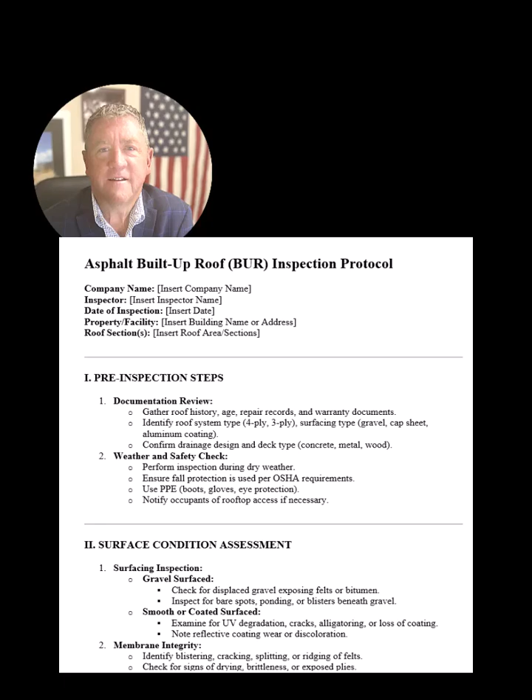I think I'll start by saying the importance of regular roof inspections is underestimated by the general public. I think for us that are roofing contractors or inspectors, we see the value and we see all the problems and issues on a daily basis. When we walk these roofs, we'll see flashing that's loose or missing, debris on the roofs, gutters and scuppers that are clogged, holes from the HVAC guys. We'll see all of these issues and problems. And people that are on the ground very rarely, if ever, will get on the roof and really see the condition of their roofs. So it's very, very important that roofs are maintained, and that starts with an inspection.

We were talking about this issue just a few minutes ago about the importance of a roofing inspection, and I just told a few of my guys: if I was a building owner of a large commercial building, let's say it was in Michigan somewhere, I would want someone, my property manager or someone, to provide me with an annual or biannual inspection of the condition of my roof, because the roof is the number one defense to the building enclosure. If the roof fails, it's very, very expensive to repair or replace. And when the roof fails, if you have a commercial building, you're usually leasing it.

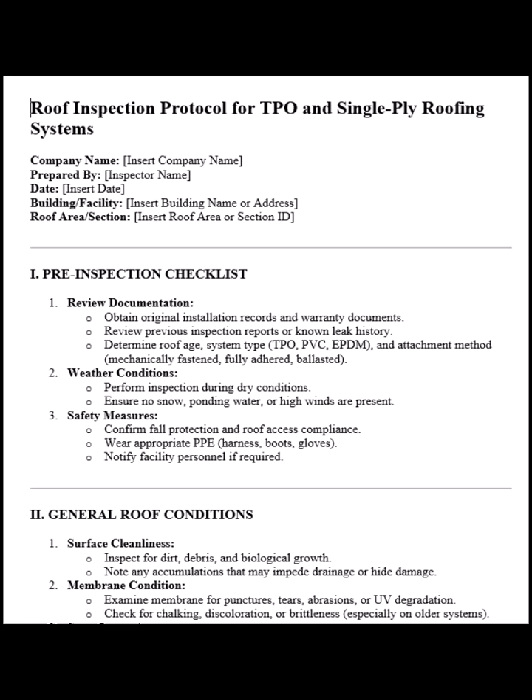I'll start with single ply inspection, okay? How's that? So this is a little template, and we're going to send this out to you so everybody has it. This is just a format, okay - you guys can doll it up and do it how you want. There's also a lot of apps and other report writing things.

We use Roof Logic, if anybody's familiar with that. It's a paid subscription, a database where you can put a lot of different roofs. You can give your clients a password, use a tablet, and when you're up there taking photos it'll live download it, so you can create a report before you even get off the roof. We love it, it's really easy to use, our clients love it too. It's really built for roofers - it has a management program that can give a rating to the roof, and that rating can be addressed through a budget, so you can actually create budgets for school districts or cities or different things like that.

So it's really helpful. But of course, if you're going to do an inspection, don't do like most guys where you go inspect the roof, take a couple pictures, walk in with your cell phone, and try to get a contract or some type of job from the client just based on going up on a roof. If you're going to go up there, you need to create a report, and your report needs to be well spelled out.

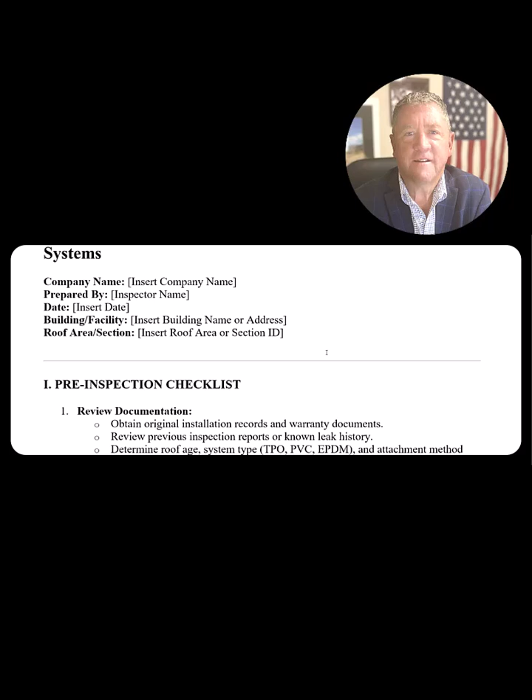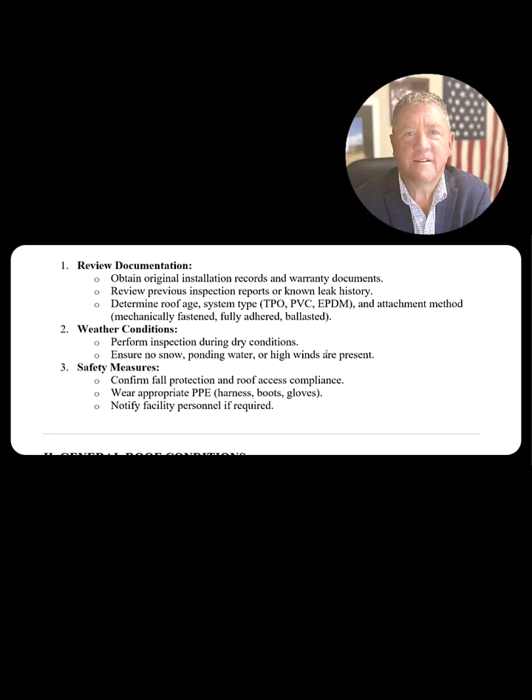Here's a lot of things that we do in our inspection. The pre-inspection checklist is to review documentation - obtain the original installation records and warranty documents. If your clients will give you this stuff, usually you have a real good chance of having an ongoing relationship with them.

And any as-built plans you can get, anything you can get from the clients is pay dirt for you to be their guy for, you know, the future. Because most inspections that we do, it's not a big money maker, right? People aren't going to pay us a fortune to do inspections, but the reason we do the inspections is when there's a storm or there's a problem or a re-roof, then we get to work. And so that's what the whole program's usually about for most people. Everybody's a little different, but for us and for others, that's the way it is.

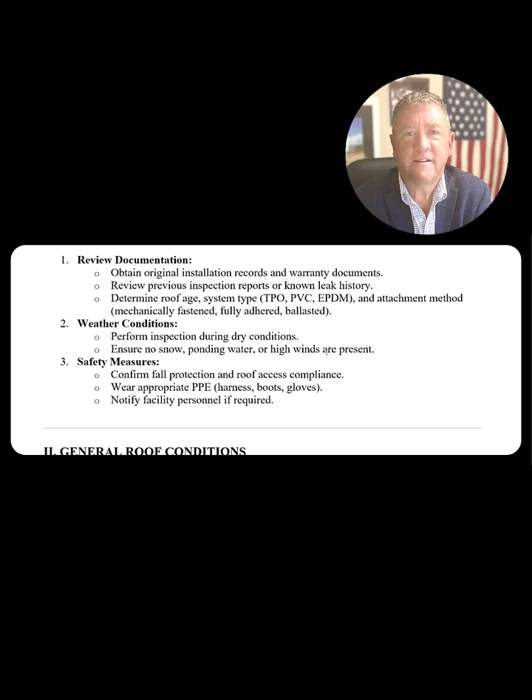But if you get the original warranties, then you can show them, hey, you had a 55-mile-an-hour wind here, or you had hail damage here, and this warranty is going to be void, even though you have a warranty. And you may want to call the warranty manufacturer out or the warranty company and have them do an inspection. Also, be aware that if there is a warranty on the building, they are the ones that have to come do any repairs. So notify that warranty company, but also educate your client that for the warranty to stay in place, they have to be the ones that come back and do the patches. So be careful with that little situation.

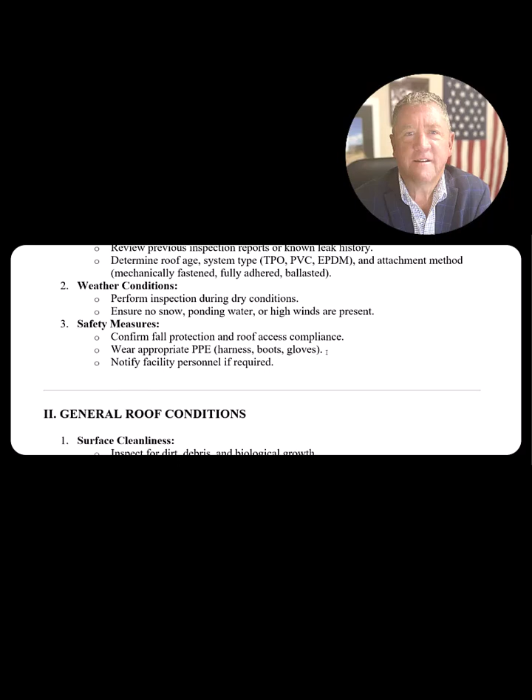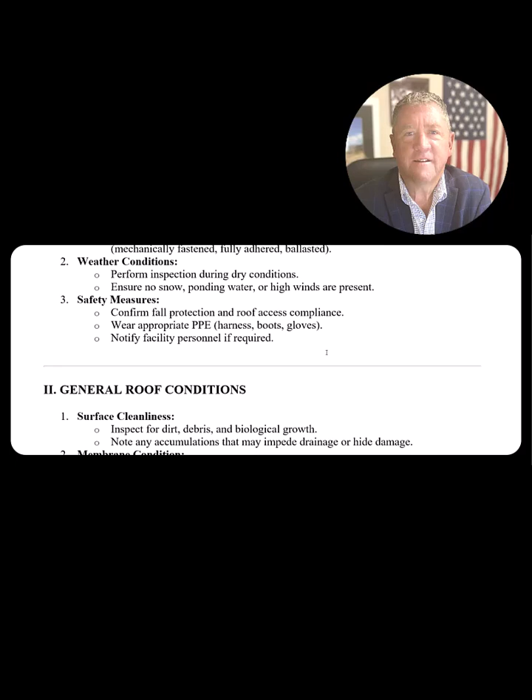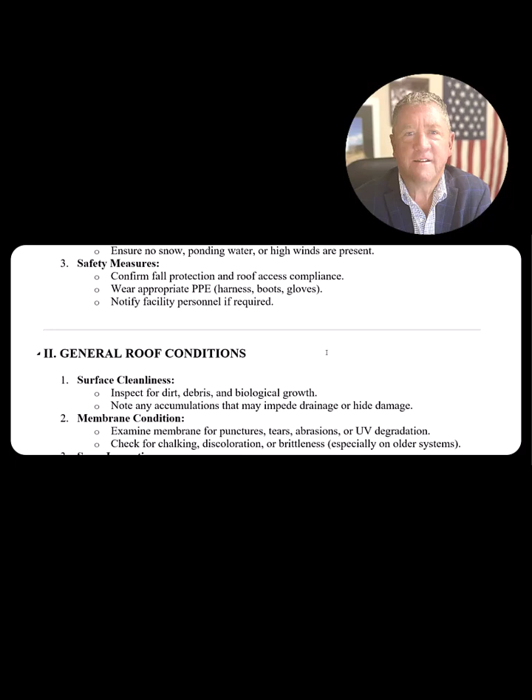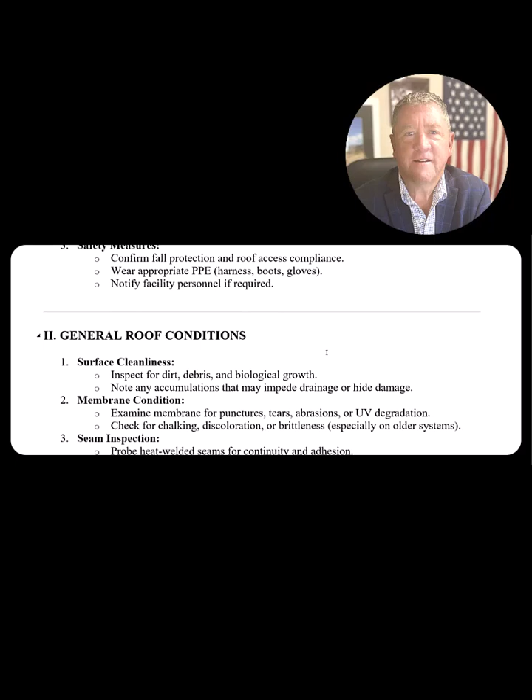Review previous inspection reports. Also, any known leak history, very important. Then determine the roof age, system type, and the attaching method. Of course, don't do inspections when it's raining or sleeting or snowing or anything like that. And also try to do it when there's no ponding water or high winds present. And then, of course, everybody knows all about the PPE and different fall protection and stuff like that.

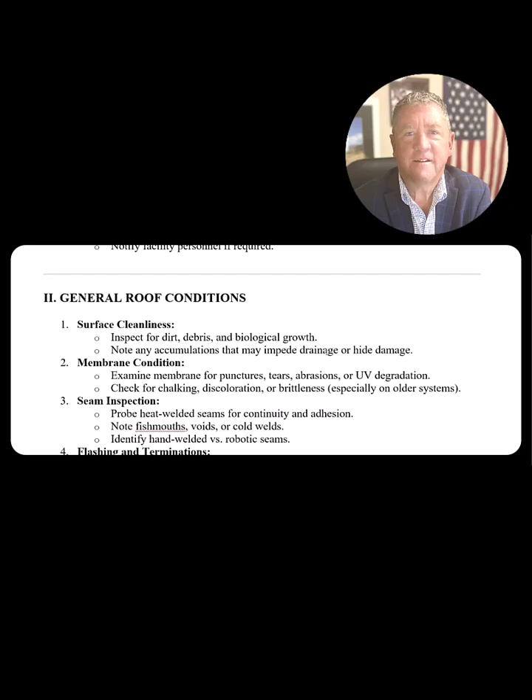Notify your client when you're coming, and also notify the facility people. A lot of times we'll have the owner of the building tell us, hey, go inspect, and we get out there and somebody's throwing a fit because we're up on their roof. So make sure that you loop everybody in, or you'll cause yourself a lot of problems. We've been down that road more than once. So make sure everybody is in line.

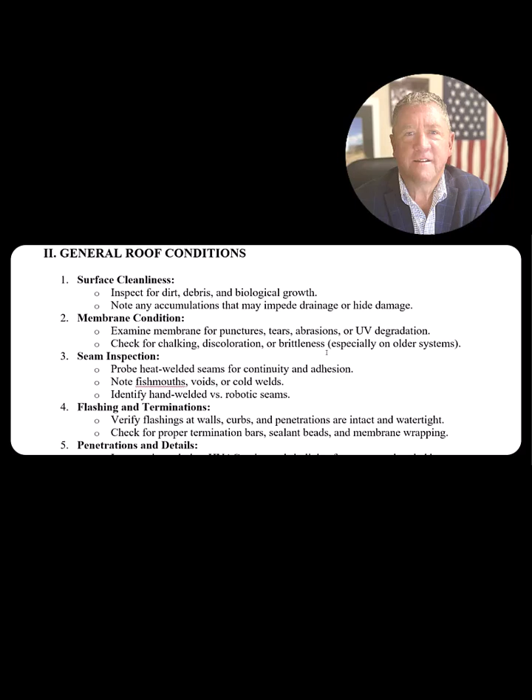If it's a city or especially a school district, make sure everybody follows the protocol. Checking in at the front desk at every location. And I know everybody wants to just blow and go and get the job done. Make sure they check in at the office, they get a badge, everybody knows they're on campus. Make sure the people that go out there are not felons, okay, first of all, or have any kind of history of criminal behavior. You cannot send people out on public institutions that have problems. So make sure that you do your due diligence in all of that area.

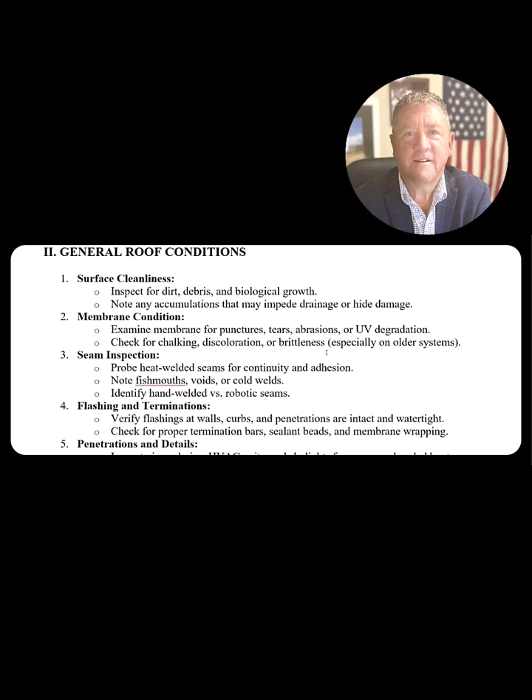But these are some general roof conditions that you want to inspect for. Dirt, debris, and biological growth, okay? And here's the thing: recommend to your client what to do. Don't just tell them, hey, there's dirt from that dust storm in Amarillo, Texas, there's 2 inches of dirt up on your roof. No, say, here's some dirt, here's some debris, this needs to be taken care of. Here's a price from our company to come and power wash it or to do whatever you're going to do. Or at least put some type of a price together where they know, hey, if I clean the dirt and debris off of this organic growth, then this is what it's going to cost me. Have systems in place, have things you can do to help the people.

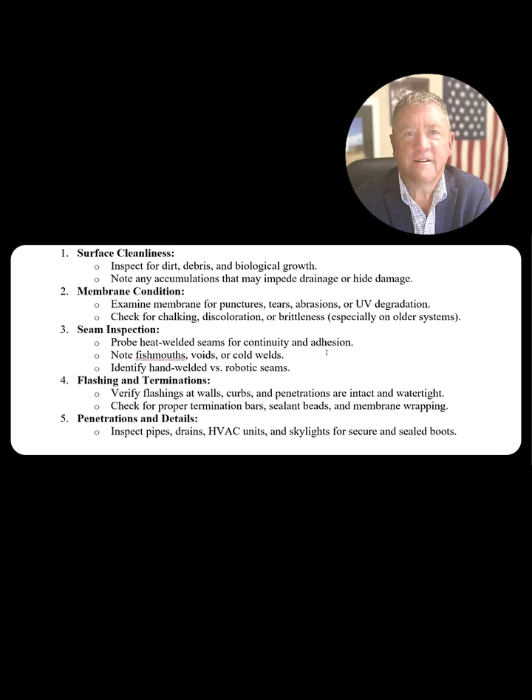If it's a modified bitumen cap sheet and it has tons and tons of granule loss and there's not enough hail damage on it for a claim, you may want to recommend a coating. And so have that information, have that price for a coating, and coatings are very profitable. But a coating is designed to give more life to the roof. That's what it's designed to do. So have those things kind of in your little bag of tricks that you're trying to sell to particular people.

Look at drainage. Look at anything that may be a problem on the roof. And you may walk into a building, and I've done this, it was a fairly new elementary school, I believe in Corpus Christi, Texas, and we went inside and looked and saw leaks, and I mean the school was probably 2 years old or less. And we get up on the roof, and immediately I find this was a design problem. They got a huge design problem here. So the first thing I tell my client is, hey, we got a big design problem.

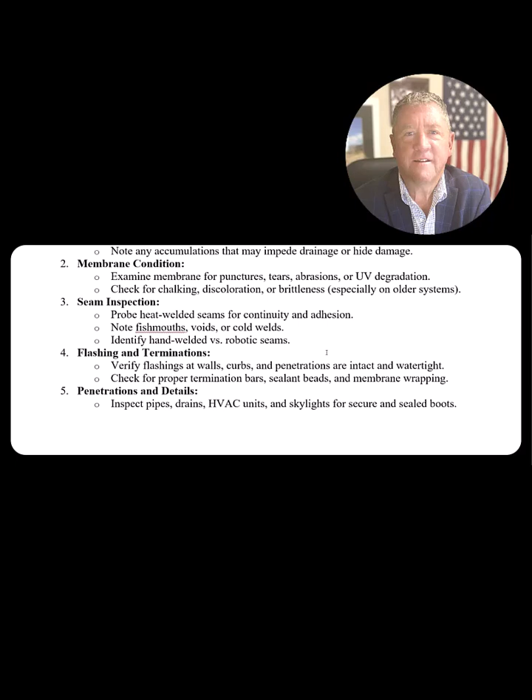You need to get with your architect and you need to get this fixed because this will not go away. If you have a bad design, there's no roofing that's going to help. I mean, it'll help for a year or so, but it's going to be a continual problem. So if you're the guy or gal that points that out and comes up with a solution, now you're the one they will begin to give their business to.

Membrane condition: examine membranes for punctures, tears, abrasions, and UV degradation. Check for chalking, discoloration, brittleness, especially in older systems. It's real important. The older the system is, the more issues and problems you're probably going to find. There's more things that you can do to give that roof some more life. And so do your research, know the products that are out there, know the proper repairs of each system.

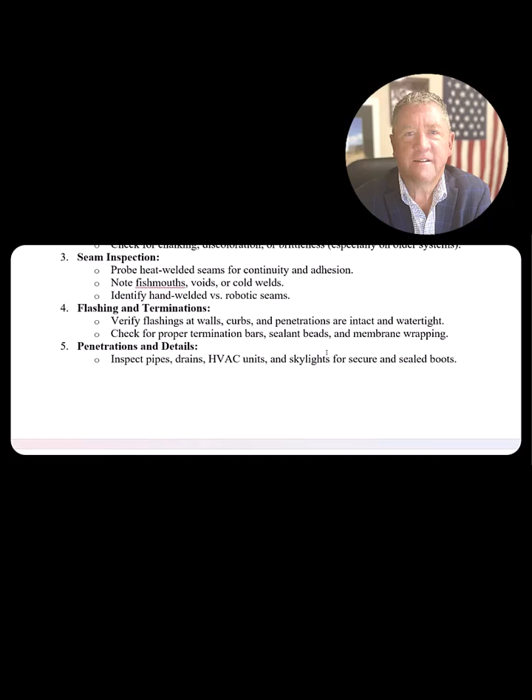In the past, we've seen a lot of coal tar roofs, and the coal tar roofs are failing. And as we look closer, we find the main reason they're failing is because people used regular asphalt on a coal tar roof. They're using the wrong product for this particular application. So know what type of roof you're on and know what the applications are and the repair methods for those particular things. NRCA has most of that stuff mapped out for all of us, and it's pretty easy to find.

Of course, seam inspection. We like to take a probe with us, and we check all the welds. Make sure they're not failing. Look for fish mouths, cold welds, and of course, here it says identify hand welds versus robotic seams. Yeah, you got to look at all those. It takes a lot of time to really do a good inspection.

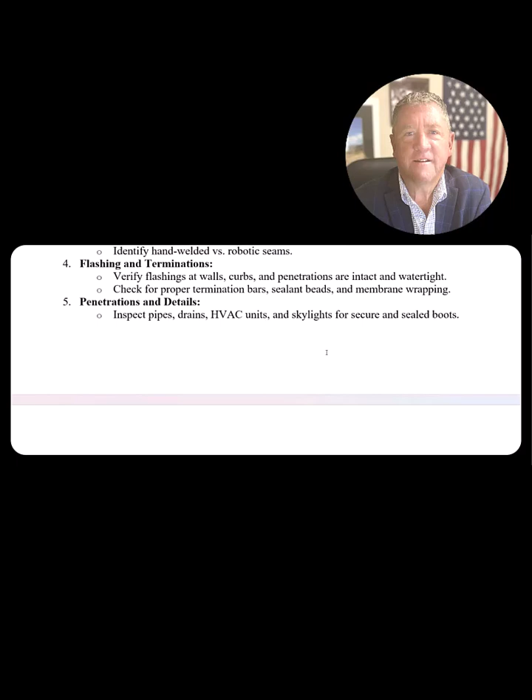You got to walk those seams, and you got to make sure that there's not an issue or a problem that's coming, because the last thing you want to do is create a report and then they have a leak 2 weeks later in a system that you just missed. So make sure that you're seeing those areas. And of course, usually the big wide open areas, those are usually robotic seams. The areas that are really, really tight, those are usually hand welded, and usually you can tell by the material as well.

Flashing and terminations, really, really big. What we find is that people don't like putting in any more screws than they absolutely have to. And so the flashings and the terminations usually don't have enough screws in them. So that should be a recommendation that you make. Do your homework. Know how many screws there should be on this particular application. Should it be 6 inches? Should it be 12 inches? Know those things so that when you get up there, you can show the issue, and then have a solution to the problem for them.

Check for proper termination bar sealants. And sealant bead is big. Sealants need to be replaced on a periodical basis. Most people don't know that or realize that. If you have sealants, caulking and different things, a lot of that needs torn out every 5 years? What would you say, Joe? Joe says about every 5 years, all that needs torn out and redone for the roof to be watertight, because the UV is really tough on roofing systems.

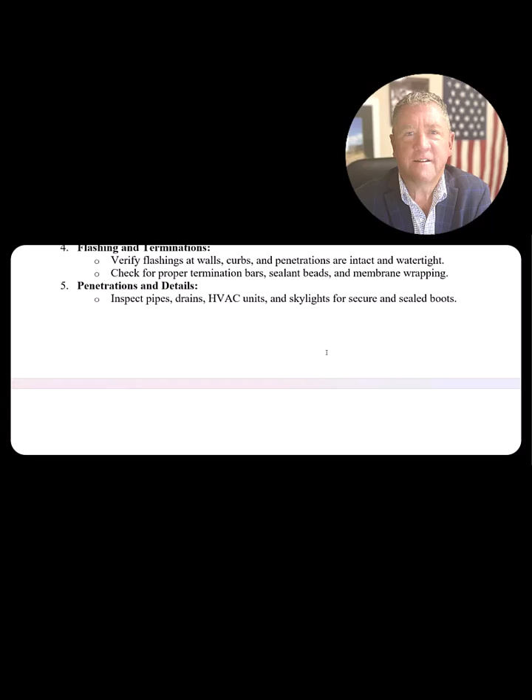The heat that's produced on top of a roof is absolutely mind-boggling. We've all walked those roofs in the middle of the summer. So just make sure you're looking for these termination bars, the different seams, and that you're doing a proper inspection on it.

Penetrations and details: inspect the pipes, drains, HVAC units, skylights, the whole deal. We like to measure the drains, 4 inch, 6 inch. Then when we do our calculations, we can quickly see if they have enough drains. We want to check to see if there's any emergency drains. If there's no emergency drains, that might be a recommendation. Hey, you don't have any emergency drains on this system, so I would recommend that we put in a scupper, or we add some emergency drains.

But do the calculations. It's real easy. If you need any of that, email us. We'll send it to you. It's real simple to do. Anybody that knows how to do simple math can do all that stuff. You can also call Core Forensics, and they'll come out and do a complete write-up for you as well.

Ensure pitch pockets are properly filled and sealed. Identify any signs of movement or mechanical damage around penetrations.

Here's what happens a lot of times: the tenant will hire people to get up on the roof and put in a vent or add a bathroom or do something, and they do horrible work on top of the roof. And the owner of the building doesn't even know. Most times they don't know that their roof was compromised. So when you find those things, also know who the tenant is below, because that could be an issue for the owner of the building. And of course, if you help them fix that issue, then you're the guy or the gal.

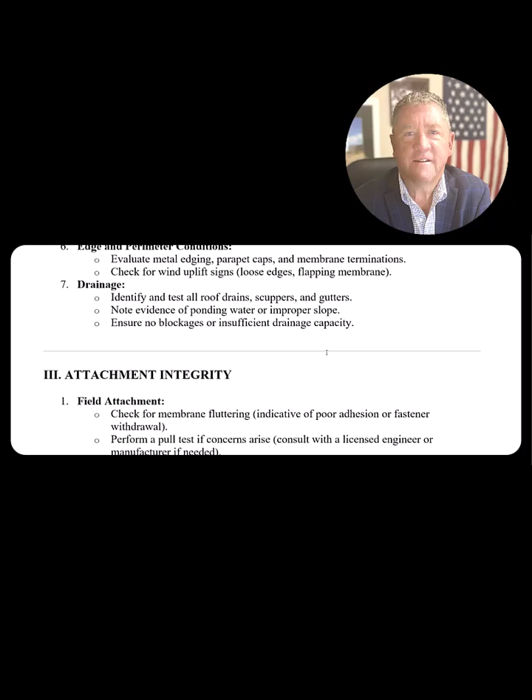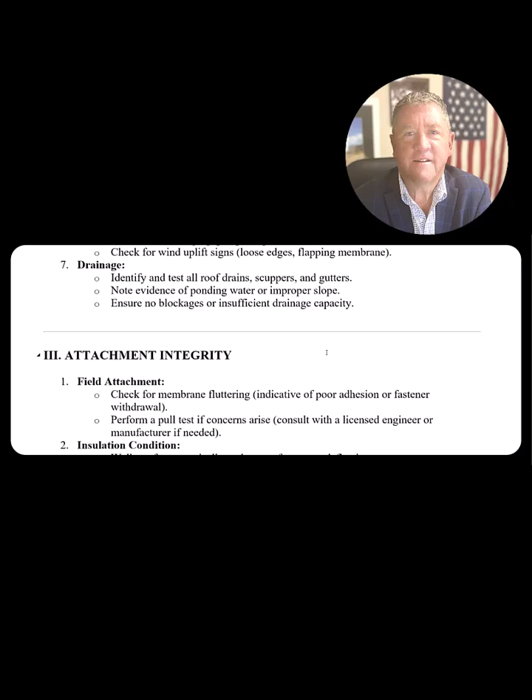So, real important. Edge and perimeter conditions: evaluate metal edging, parapet caps, membrane terminations, check for wind uplift signs, loose edges, flapping membrane.

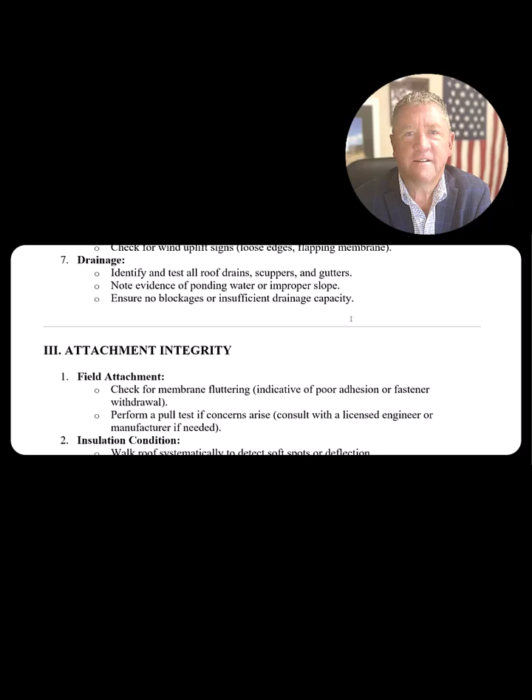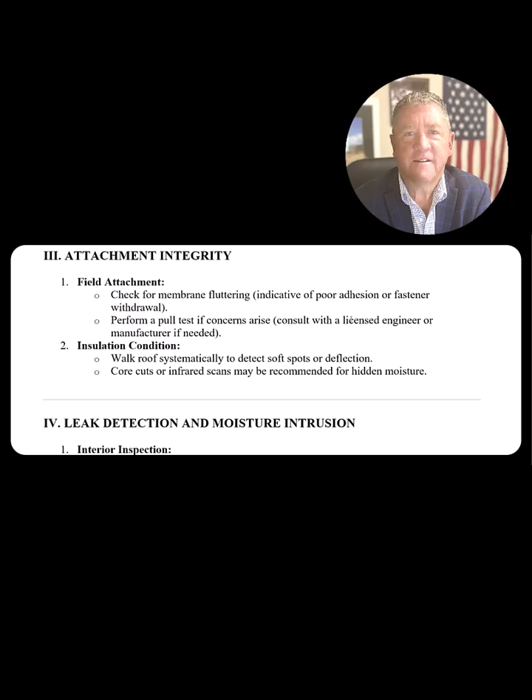So just be careful that you're seeing everything. Spend some time on the roof. Make sure you don't miss anything, because all this is very, very important. Next we're going to talk about attachment integrity. The attachment integrity on that photo I showed you was inadequate. Whenever it lifts like that, there's no adhesion anymore. If a fastener is pulled up, it's not fastened anymore. That is a recipe for disaster, because a high wind comes, takes that roof, peels the rest, and now you have total calamity in the entire building. It can destroy the whole building when the roof's gone. So make sure those things are taken care of and repaired properly.

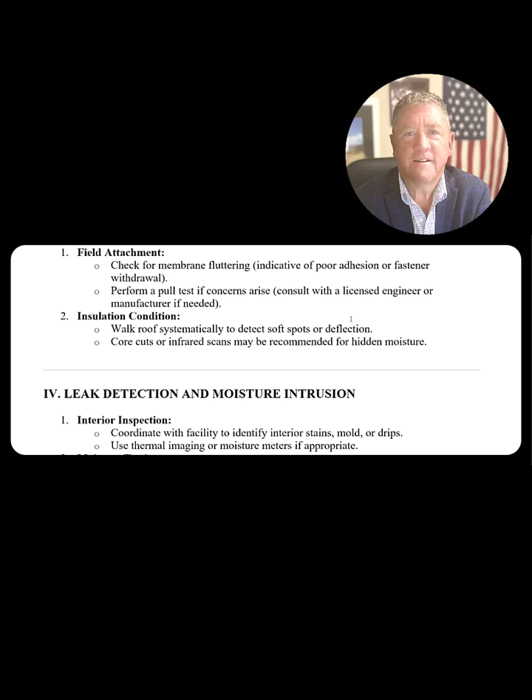Perform pull tests. If a concern arises, you may want to consult with a licensed engineer or a company like Core to come out and do pull tests or a moisture survey, or you may want to do a moisture survey of your own. There's a reason that the fasteners pull up. It's usually the wind uplift. Sometimes it's a bad deck. So begin to tell your clients the problems that they might have on their roof.

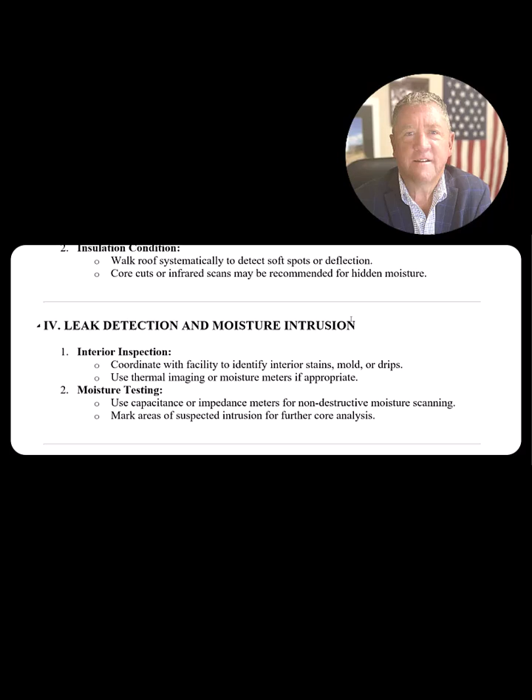Insulation condition. If you walk the roof systematically, you'll detect soft spots and deflection. Make sure those areas are inspected and not left undone. There's usually a leak or something going on in that area. Even though it may not be leaking on the inside, if the roof is soft, you got a problem. Something happened. Core cuts or infrared scans may be recommended to find hidden moisture. Then, of course, leak detection and moisture intrusion. Moisture intrusion is the worst thing that can happen to a roof. As soon as you have moisture intrusion, the roof begins to deteriorate and will fail prematurely.

Interior inspection. You want to coordinate with the facility, identify stains, molds, drips, use a thermal imaging camera or a moisture meter.

Does somebody have a question? Okay, I thought I heard something. Maybe it was myself.

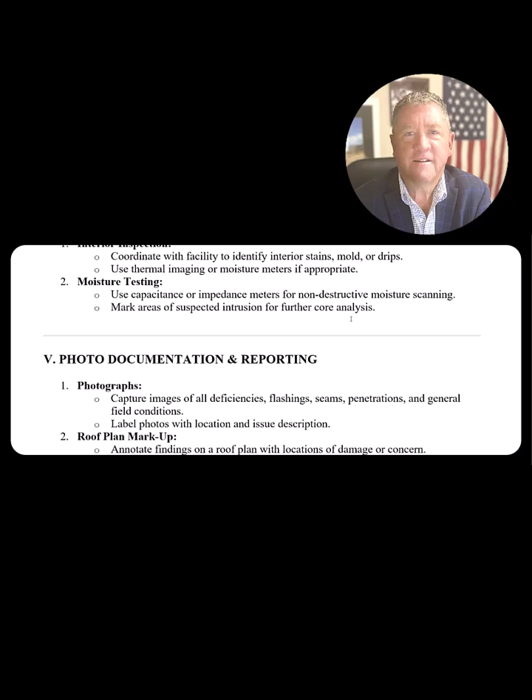And then, of course, moisture testing. Use capacitance or impedance meters, non-destructive moisture scanning, or infrared. And then mark those areas for core analysis.

Photo documentation reporting, again, it's paramount with everything. Capture images of all deficiencies, flashing, seams, penetrations, and general field conditions. What I like about Roof Logic is we're able to embed a photo and put an arrow to where that deficiency is right on our roof CAD. So it's real easy for not only the owner to see, but also for the guys that are doing the maintenance or the repair.

You actually can give them the CAD and it'll have pictures, but you can do that yourself using Google Earth and different things. You don't have to pay for a big system to help you. You can do that on your own. But I like having the documentation and an actual spot on the roof that will show them where the issues and problems are. You don't want them to have to go up there and reinvent the wheel if you've already done all the work.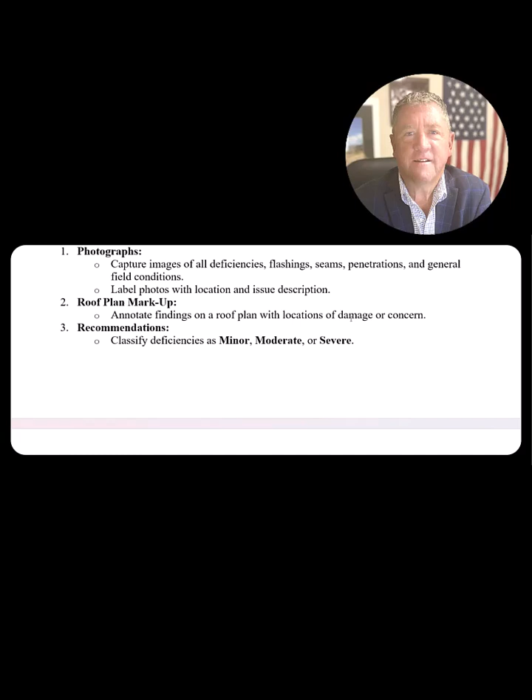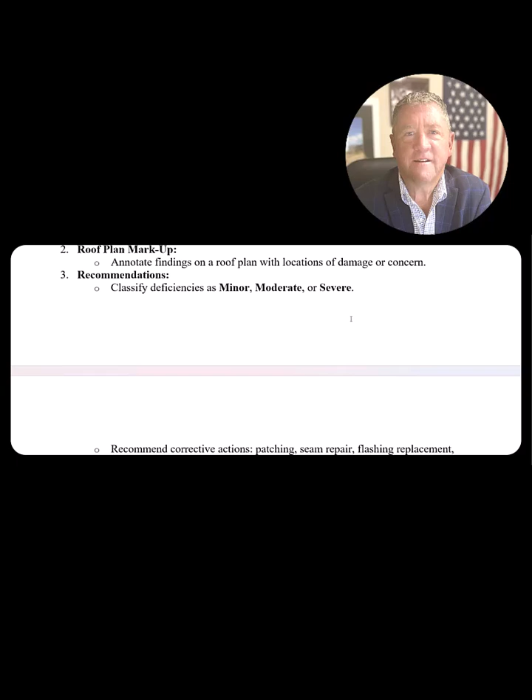Capture all deficiencies, and then, of course, label photos. We talked about that. And then sometimes you can mark the roof. You have to get permission from your owner, but if you have areas, you can actually put marks on the roof, a little dot of red paint, or a lot of times the red grease pencils work really good. Those kind of things to mark the roof up.

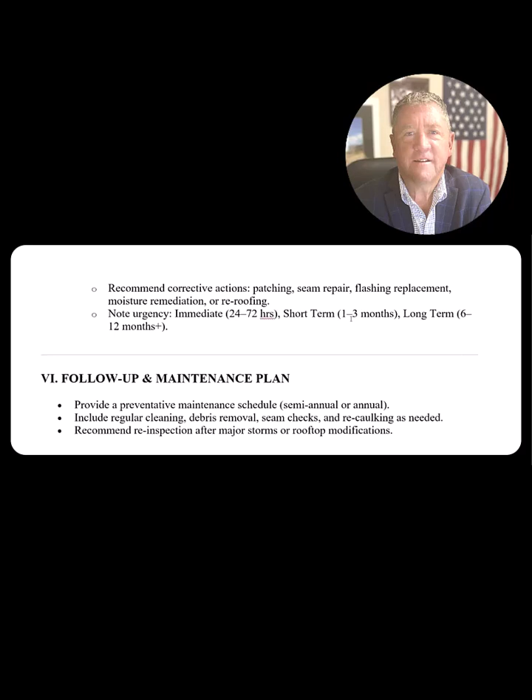And then, of course, recommendations. In Roof Logic, I think there are 4 different categories. This particular protocol has 3, which are minor, moderate, or severe. And here's kind of the recommendation, corrective action. Immediate is 24 to 72 hours. Short term is 1 to 3 months. And long term is 6 to 12 months.

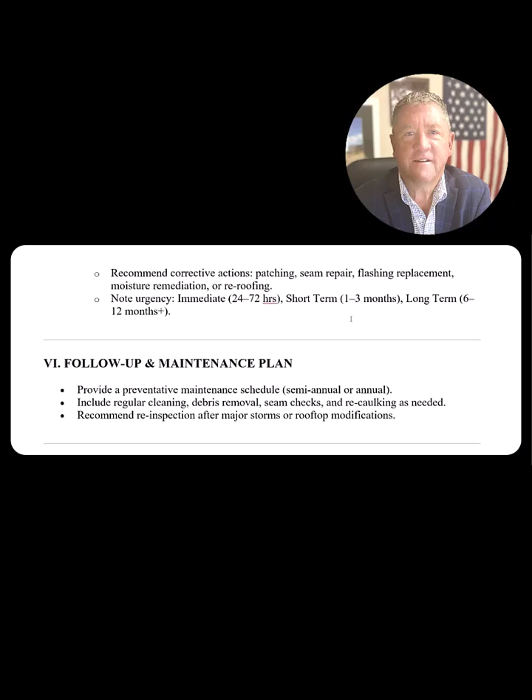So have these things in front of your client so they understand, hey, this is immediate. This is 911. I got to get this done today. I got to make a decision. Or we need to do this in 6 to 12 months. This is something we can plan for. So have that in front of your people.

And then, of course, follow up with a maintenance plan. Provide a maintenance schedule. Perfect scenario, twice a year. If I had a roof, I would like to do it after the peak of storm season in my area, and then before winter comes, when there could be possible snows and other issues that could cause more damage. So if it was a June or July inspection and then maybe an October to December inspection, that would be perfect on roofing. If it was my roof, that's what I would need.

And here's what I would recommend too: creating a plan based on the age of a roof. So let's say, as an example, if it's a single ply TPO roof, I would say at year 5, all caulking and termination joints are inspected, all caulking is removed and recaulked, and pitch pans are checked or even redone. Drains are cleaned, that kind of thing.

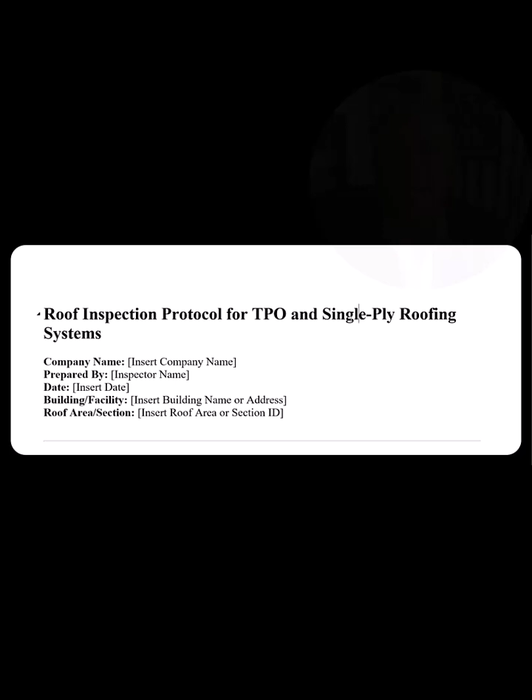Yes. Now, coatings were created typically to give more life to a roof, and they were usually a built-up roof. Most of them had cap sheets. Okay, modified bitumen cap sheets. And the coatings were created to give it some more life, because as soon as you start losing the granules off of a cap sheet, it deteriorates really, really fast because of UV.

And then next thing you know, you have leaks, you have problems, and the thing disintegrates, right? So the coating would give it more lifespan. That's what it's created for. And it works. Typically, a modified bitumen cap sheet starts to lose granules and deteriorate pretty significantly after they're 10 years old.

And where it is in the country, whether it's coastal or intercoastal, all those things apply. Whether there's a lot of snow or weight of snow, those things all matter. But I'm just talking about the Dallas-Fort Worth area, 10 years to 15. It's going to need a coating if you want to keep that roof alive up to the 25 year mark. 25 years is really pushing it for a built-up roof with a cap sheet. If they're that old, they're pretty brittle. Okay.

BURs, which is a gravel ballasted built-up roof, can last longer, mostly because the gravel is protecting the roof from the ultraviolet. So it doesn't dry out as much as long as it's well maintained. Of course, the coal tar roofs last the longest. There's some that are 60, 70 years old out there, and they're still performing.

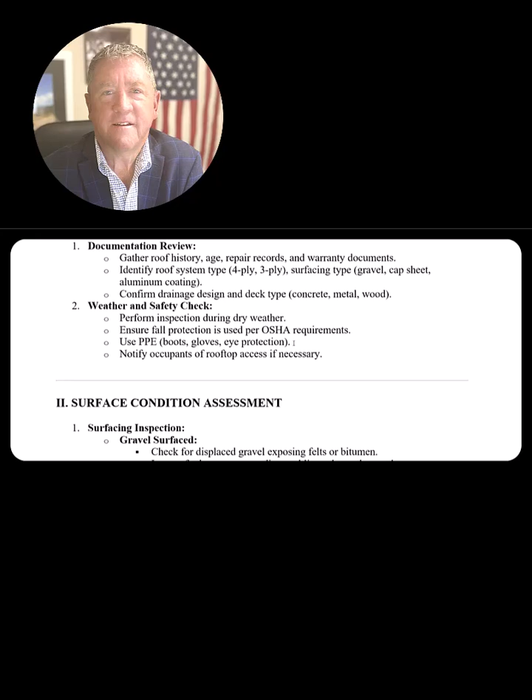Okay, this is the asphalt built up roof, BUR inspection protocol. I've already talked about a lot of this, so I won't go into great detail. And once again, we'll send all these to you so you have them. But same thing: gather roof history, repair records, identify the system, 4-ply, 3-ply, surface type, gravel cap sheet, aluminum coating, whatever it is, understand that.

A lot of times you have all of those at one spot. I don't know who the roofers are out there doing repairs on roofs, but on a BUR roof, they'll come and put a big piece of TPO on the area that's leaking, then use a termination bar along the edges. Shame on whoever did that, is all I've got to say. Make sure you're repairing these roofs properly.

On a BUR roof, if it's an old roof, the viscosity of the roof is kind of like paint. Paint has some elasticity to it; as it ages and gets old, it loses that elasticity and begins to crack. Asphalt is the same way—it loses its modifiers, and next thing you know, it becomes brittle and begins to crack.

So years ago, I was like 21 years old. I had this great big church that had roof leaks everywhere. We did a lot of BUR roofs, even a lot of residential houses in El Paso, where I lived, were all BUR. So I get up there with my crew, and we were pretty good at fixing leaks. We get up there and do all our deal and proper repairs. And it rained about 3 weeks later. No, I'll take that back.

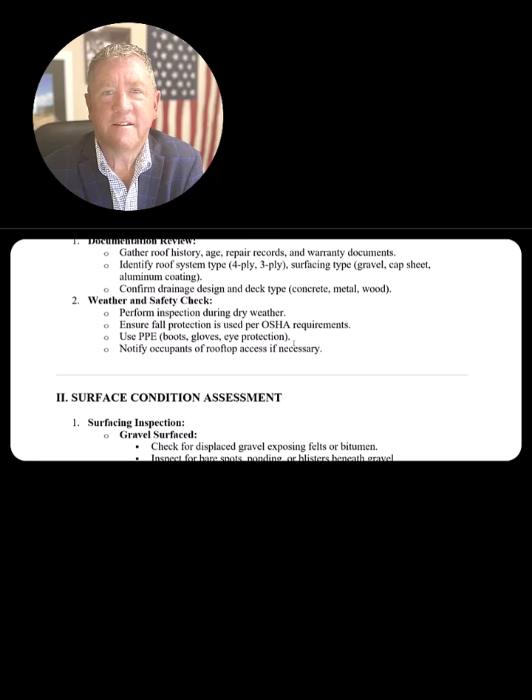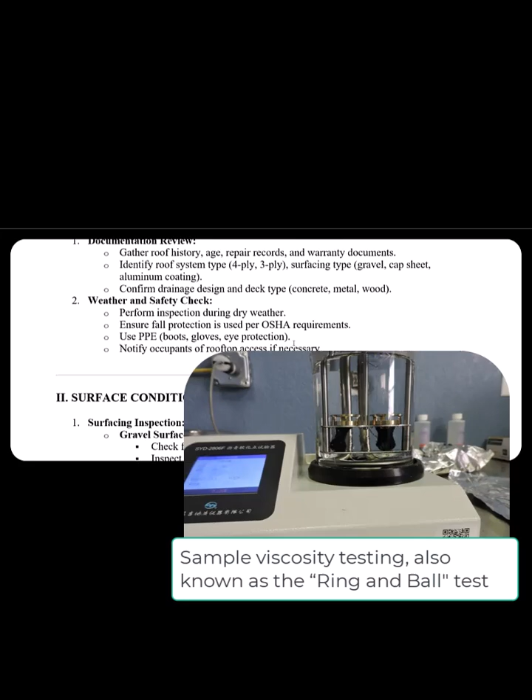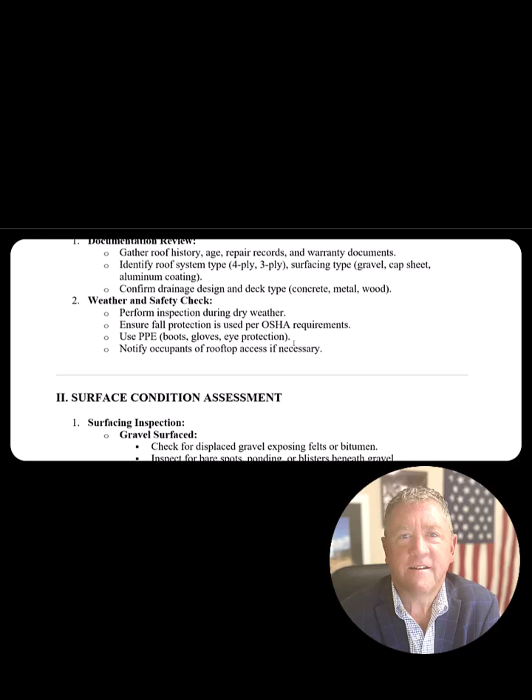I'll give it my best shot. Here's what it's going to cost. I have no guarantees. But the reason that was happening, I found out many years later, was because old asphalt will not bond with new asphalt, since the modifiers and the viscosity are gone in that asphalt. So make sure that if you get an old roof and you're going to do a repair, you do a core sample. Send it to a core forensics lab, and they'll do a ring and ball test to see if it'll adhere to the new asphalt. Otherwise, run away from it. Recommend a new roof, or do a patch job with some asphalt and other stuff, but be really careful if you think you're going to fix a leak on an old roof.

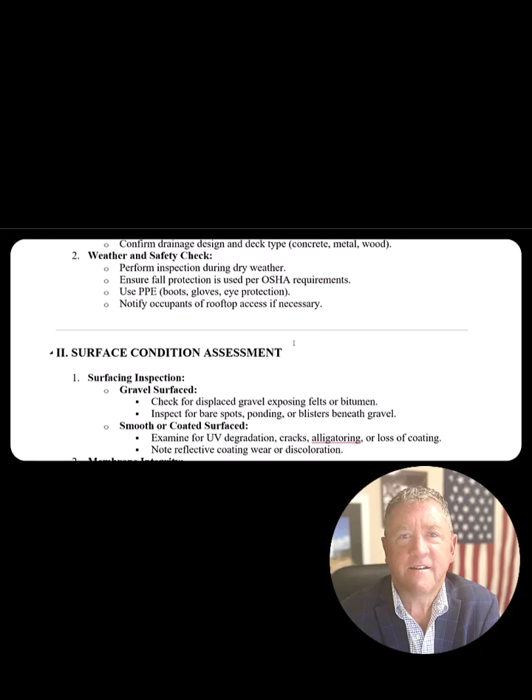Confirm drainage and design and deck type. What kind of deck does it have? Weather and safety check, of course, we talked about all that.

Then surface inspection, the gravel surfaced roof. Check for displaced gravel, exposed felts, or bitumen. If there are a lot of areas on a gravel surfaced roof that are bare, or the gravel has moved away because of rain, or sometimes because of the building flexing, or blisters and other issues, make sure you can patch that roof, but also give them the option of doing a flood recoat or something like that to get that gravel back in those exposed areas. Because if you're just pushing gravel over or adding gravel without some type of asphalt or adhesive, it's all going to wash away again and you'll have the same problem. So in your estimate or recommendations, make sure you include something that ensures the asphalt or gravel stays on top of the built-up roof.

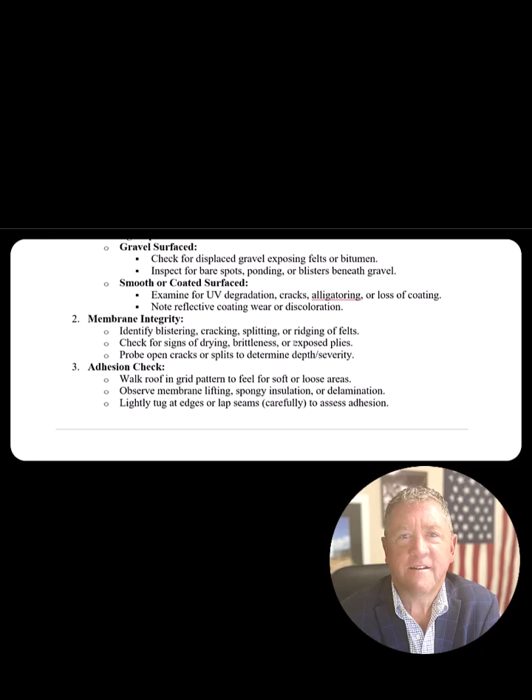Blisters. How can you tell if a blister is from installation or from wind uplift? It's easy, you have to cut the roof. If you cut the blister and it's as slick as a baby's butt, that was installation. The asphalt either cooled, or wasn't a good coating, and the sheet just laid over the top without adhering to the sheet below. But if you cut it and it's rough like my face in the morning, there was some type of adhesion that went on, and this is more than likely from wind uplift.

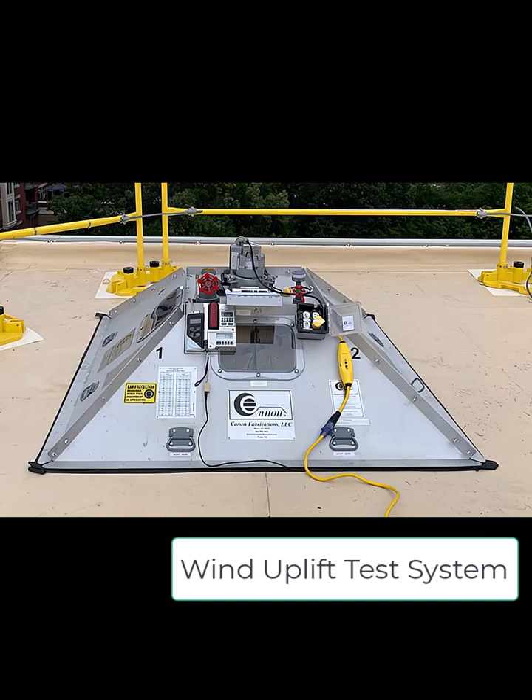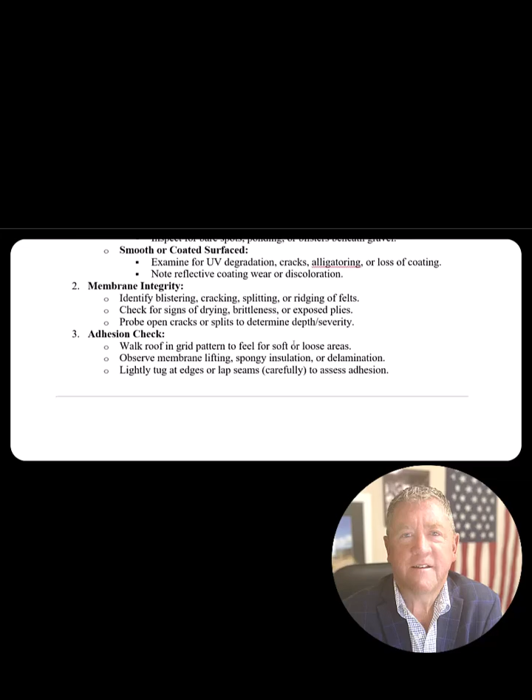Gravel ballasted roofs, that's one of the negatives, they are susceptible, like all roofs, to wind uplift. So be sure you look at those issues, and then you're putting together the right recommendation for repair.

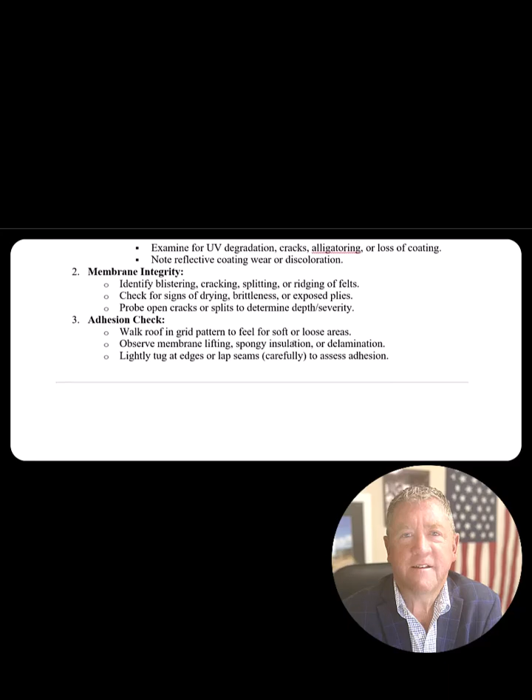Examine for UV issues, cracks, alligatoring, loss of coating, reflective coat wearing, discoloration. All of those are issues. Most people don't realize this about a coating. A lot of people put a coating down and don't really do the due diligence on whether that coating can be applied in that particular region or area. Most of us have been on roofs where the coating looks great, except in one spot where the coating is just flaking and peeling.

There was an issue with adhesion of that coating in that particular area. There's possible moisture in the system. So a moisture survey is mandatory, especially if you want a warranty on any kind of coating system. Make sure you're doing a moisture survey to confirm there's no wet insulation, or the coating will never stick.

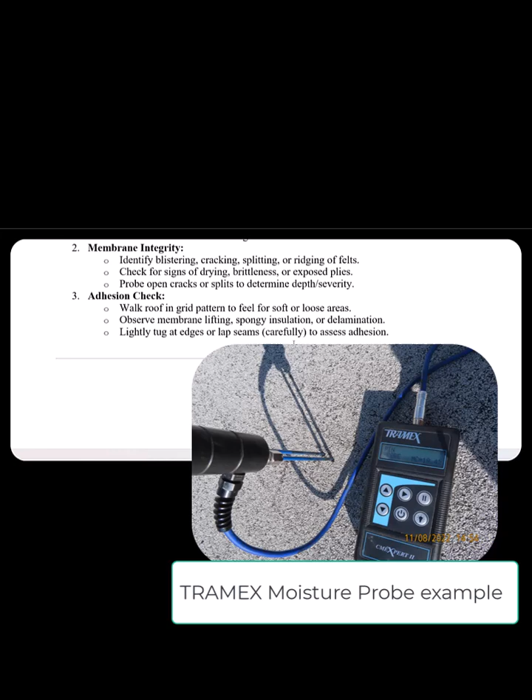We just had a loss in Abilene, Texas, where hail impacted the coating and busted it up, and they said just power wash it and put another coating on it, that's what we're going to pay for. Of course, it's always the easy way out, right? Well, he tried. The roofer got up there and power washed it, and it kept coming up, kept coming up. It was like an endless flaking away of this coating. So he called us, and we went out and inspected it and got with the insurance company about it.

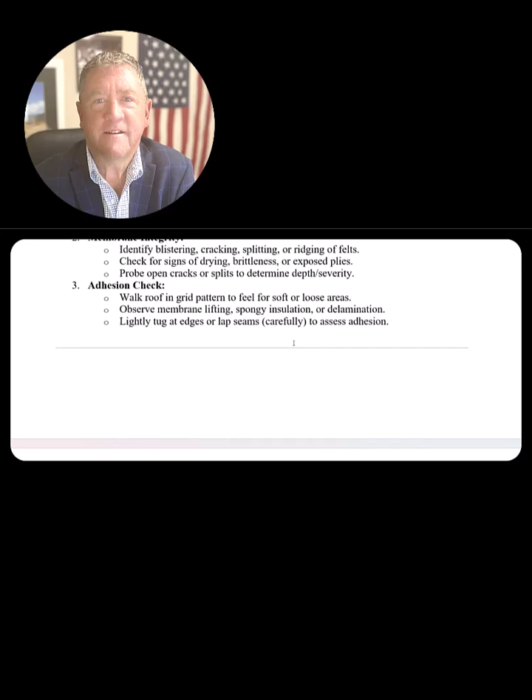But it was irreparable, the roof had to be replaced. You couldn't go over the top of this coating because nothing was going to adhere to it. Remember, there's an adhesion test you can do with the coating, so do your adhesion test. Make sure it's going to adhere to that particular product before you recommend it to your client. And then, of course, membrane integrity, to identify all the issues: ridging, splitting, dryness, brittleness, exposed plies.

Probe open cracks or splits to determine the depth or severity of that particular issue. A lot of it is slippage. Most people know what slippage is on a system.

Just check those issues, and you may want to recommend to your client, hey, this roof is beyond its lifespan. We can get a few more years out of it by doing this, and this is going to be the cost. We recommend replacement, but here's what you can do if you need a few years on this roof. Just be advised, it's not going to be watertight, it's probably going to leak, it's probably going to have problems. But a lot of guys will just patch it up and hope for a good storm, then the insurance company will pay for it. And that's what a lot of property managers do, okay, and that's their prerogative. But have some type of assessment that you can give them because that brings value to your client, which then makes you their guy.

Adhesion check. Walk the roof in a grid pattern. If you feel any soft areas, same thing, observe lifting membranes, spongy insulation. Slightly tug on the edges or lap seams to assess adhesion.

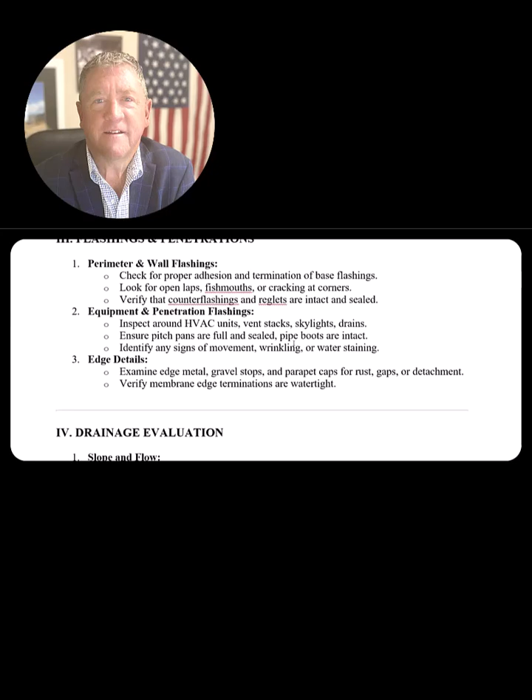And of course, flashings and penetrations. Check for proper adhesion and termination of base flashings. Look for open laps, fish mouths, cracking at the corners. Real important. Corners are a big deal, especially on these big, large buildings. Not just the corners on the outside perimeter, but also the corners where they might have an expansion joint. Check those corners because a lot of these buildings will move and shift, and they have some expansion and some retraction going on. So check those areas as the building might be moving and causing some issues.

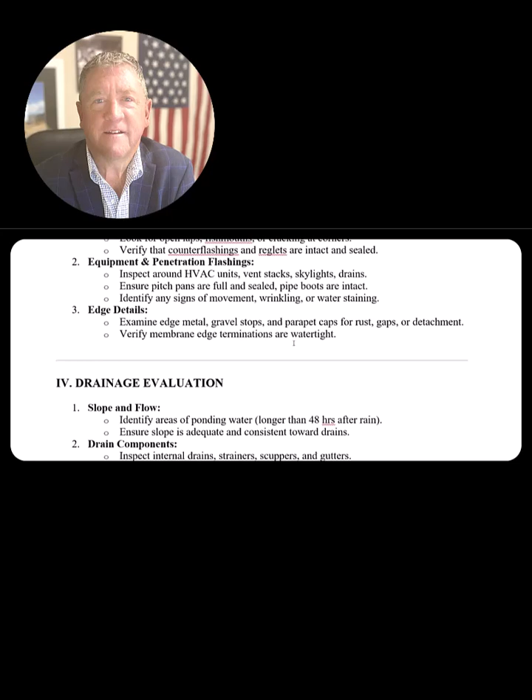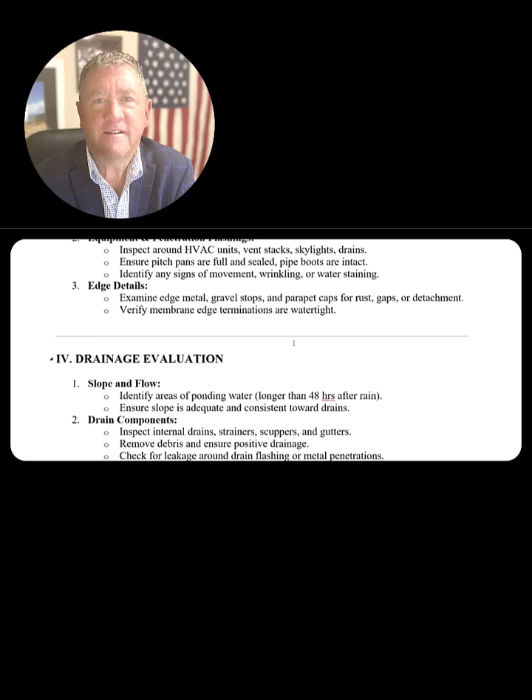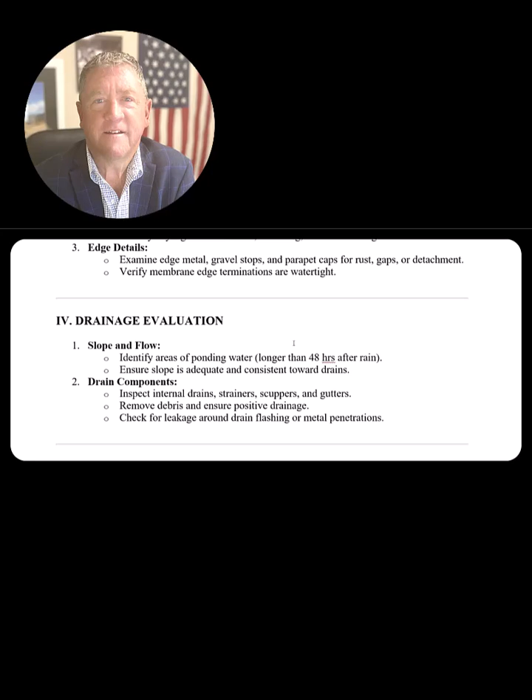Verify counter flashings and just seal everything, make everything like it's supposed to be. Equipment and penetrations, inspection around HVAC units, vent stacks, skylights, drains. Ensure pitch pans are fully sealed, same thing. Identify signs of movement, wrinkling, water staining.

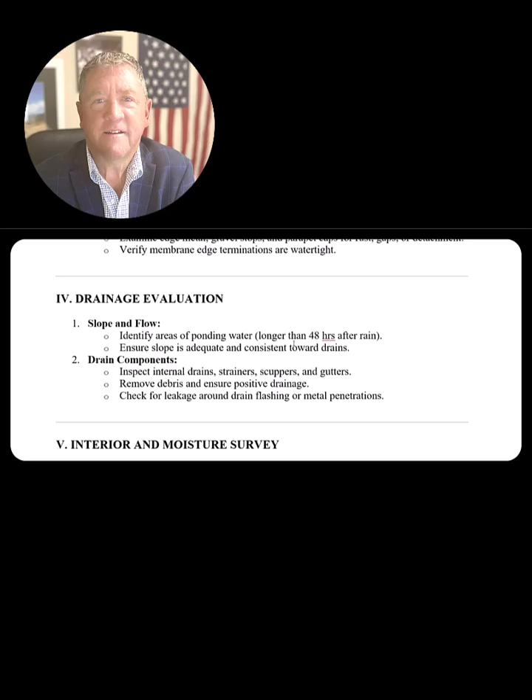And then look for edge details. Examine the edge metal, the gravel stops, the parapet caps for rust, gaps, and detachment. All these are really, really big issues, especially on a BUR roof or a BURG, either one. And then, of course, the termination joints are watertight. Make sure there's enough screws in the HVAC unit so that if a big windstorm comes, it's not going to blow off the HVAC unit.

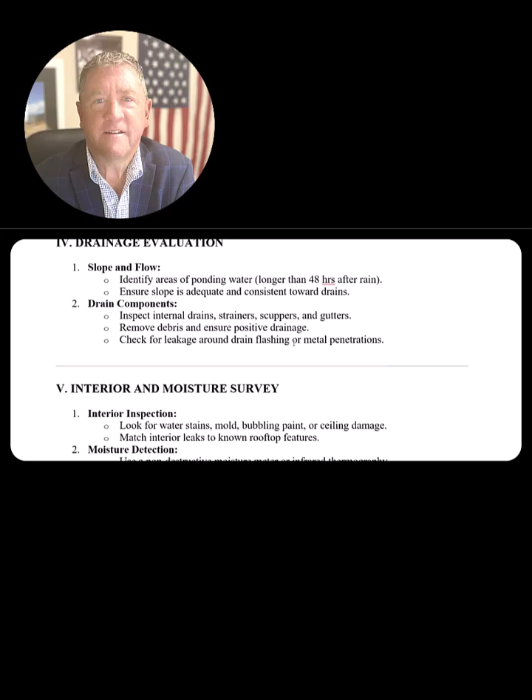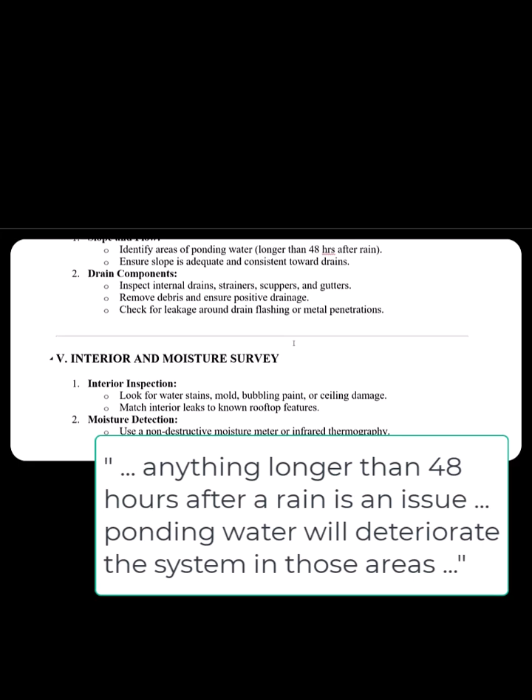And then, of course, drainage evaluation, slope and flow, identify areas of ponding water. Anything longer than 48 hours after a rain is an issue. Ponding water will deteriorate the system in those areas, okay? Not just that all the crap runs to that bottom and creates organic growth, but also just the water being on the roof for long periods of time is very, very problematic to a roofing system.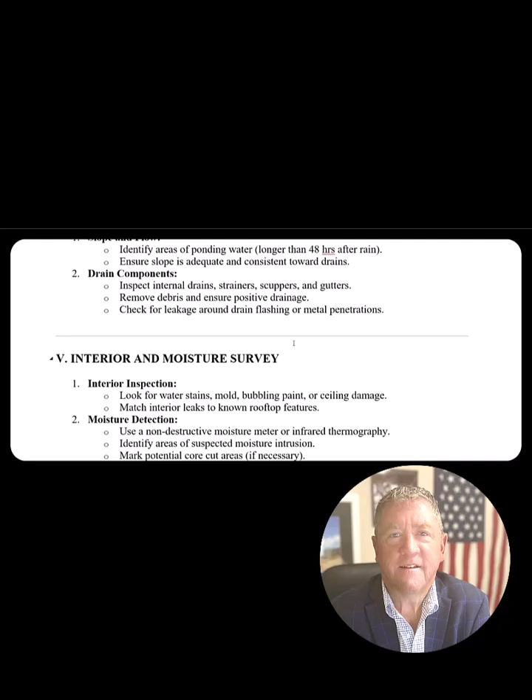So a lot of times we'll go up, we'll document when it rains. When it quits raining, 48 hours later, we'll go back, take photos, and we can timestamp whether there's ponding that really needs to be dealt with on this particular roof. Ensure the slope is adequate and consistent toward the drain.

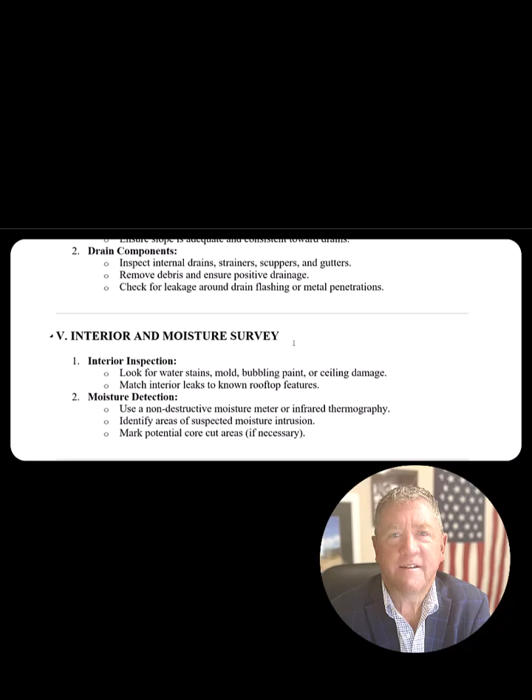And if you have a client that's real interested in drainage and there's drainage problems, it's real easy to invest in - I think they're under $1,000 - a laser level. You can go up on that roof and do a 10 by 10 grid, mark down one area with numbers, mark down the other way with letters, and then do a grid system, and you can get exactly the slope of that roof, down to a 1/16 of an inch. It's real simple to do, and anybody can do that. And so you can charge your client for that.

Say, hey, we really need to know what this particular building's doing. A lot of buildings, especially over there in Dallas, the Irving area, they got 6 inches, 8 inches of movement in some of that soil. Some of those buildings have moved around, and there's no draining at all. You may want to recommend, hey, on this roof replacement, we're going to recommend that you put in a tapered system, because it's draining the wrong way now, where it used to drain okay. So whenever you're the expert, you're going to get credibility with your client, and that's what you want to build.

Drain components: inspect internal drains, strainers, scuppers, gutters, all of that. And I guarantee you, if you go to your client and you start inspecting the drains and you walk inside and then you're recommending that the drains are roto-rooted, he's going to go, man, this guy really knows what he's doing. He's taking care of business. If you put together a drainage package for him and he understands it, to me, that's pay dirt for your client. They'll always call you back.

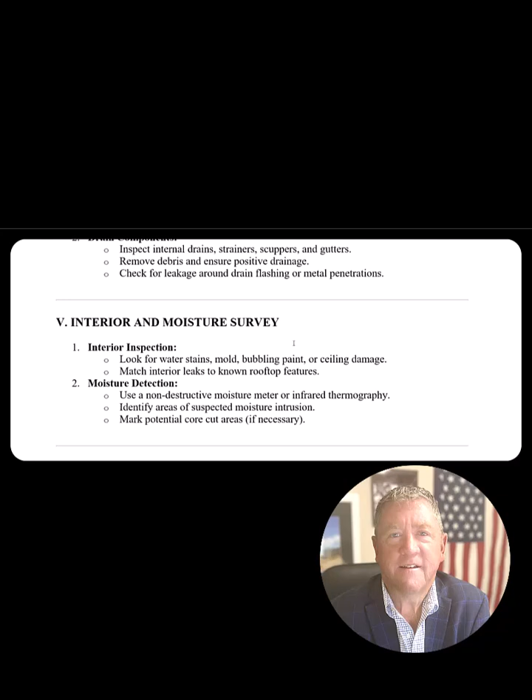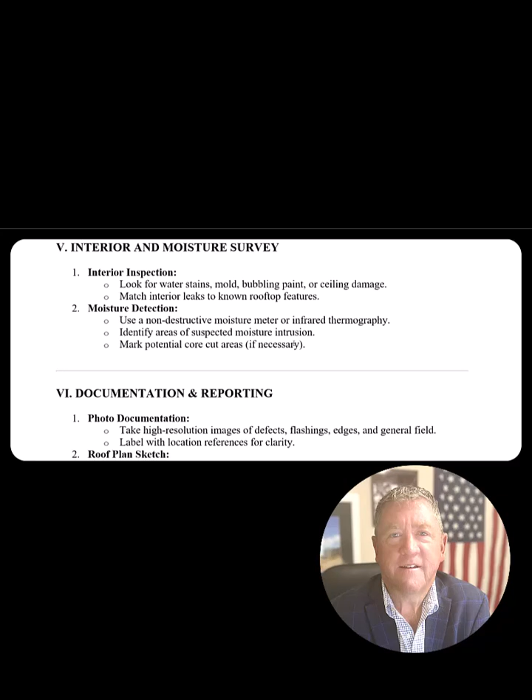Remove debris and ensure positive drainage, and then of course, check around all types of flashing and metal penetrations. Interior inspection: look for water stains, mold, bubbling paint, and ceiling damage. Match interior leaks to known rooftop features. That's a big deal, because if you can find the leak on the inside, you can usually go on the outside and find the culprit.

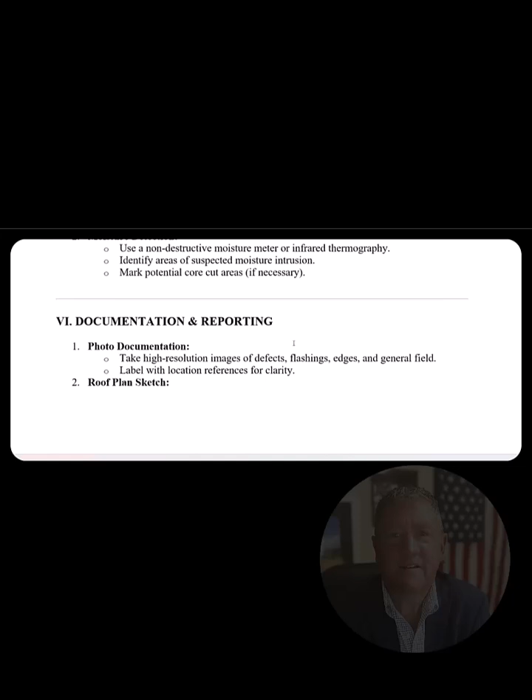And then you can tell them, hey, this was right underneath this HVAC unit, and the guy isn't maintaining his units well, and here's the problem. It's into the insulation. Just different things that you can tell your client. And then moisture detection: use the different types of infrared and moisture meters that we've talked about. And then of course, back to documentation and reporting. Photo documentation. Take really good photos. Also take photos of the entire roofing system, okay?

I don't know if anybody has a copy of my book, but in my book, I talk about the proper way to document, and you should start in the corner of a building, and the pictures should overlap so that every part of that roof has a photo you could zoom in on to see if there's damage. Do all the corners of the roof, and then do detailed photos throughout. But if you have documentation of the roof, and you may say, hey, this roof's in great shape, you just need this done or that done, you now have a baseline for your client that is very valuable to him.

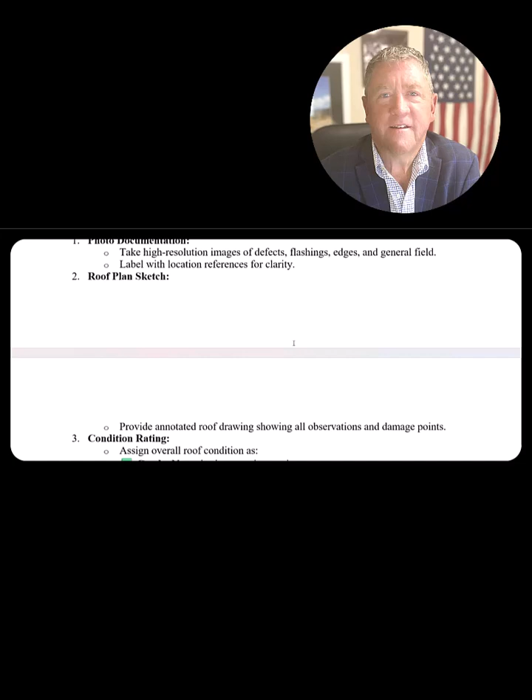It's valuable because if he's going to sell the building, he can provide that report. Hey, ABC Roofing looked at my roof. Here's the photo file. Here's the report that he created. He said these were the little issues. We took care of that. Here's the estimates for that. Here are the checks for that issue. And here's a history of that every year for the last 10 years. As a new owner, they're going to be really excited about buying that building. So it adds value to that client. And it will keep his building from falling apart, knowing all the deficiencies and particular issues of that building. So it's very important that people get their commercial buildings looked at on a regular basis.

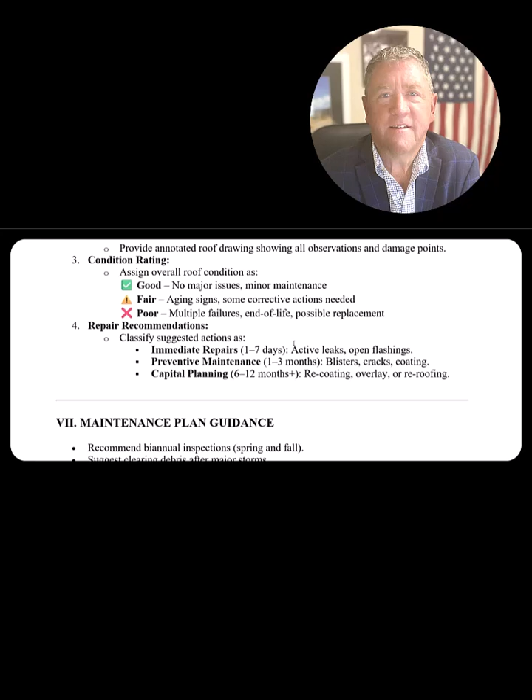Again, condition rating: good, fair, poor, or you can create your own metrics. And then, of course, the repair recommendations: immediate, preventive, or capital planning. Put together a plan for him, spring and fall. I love late spring here and late fall in this area. In a hurricane area, it probably would be spring and fall. They want to know before a hurricane hits, what were the conditions of the roof? And then after the storms were over, what are the conditions of the roof? They're all really important.

Debris cleaning after major storms. And this is a really good segue to getting clients, after a big storm. Hey, we just had a big storm. It blew a lot of limbs and branches, and we have a crew that can come out and assess and give you a real quick estimate of cleaning all your drains and cleaning all the junk off your roof. And we'll look to see if there's any storm damage. Who wouldn't want that? Those are all really good things to do that will help people that have a roof, because people want to know.

They're not going to get up there. They've got to go through dead pigeons and everything else that's up there. It's amazing what you'll find on top of a roof. I think people live up on some of those roofs. I found blankets, and I don't even want to talk about it.

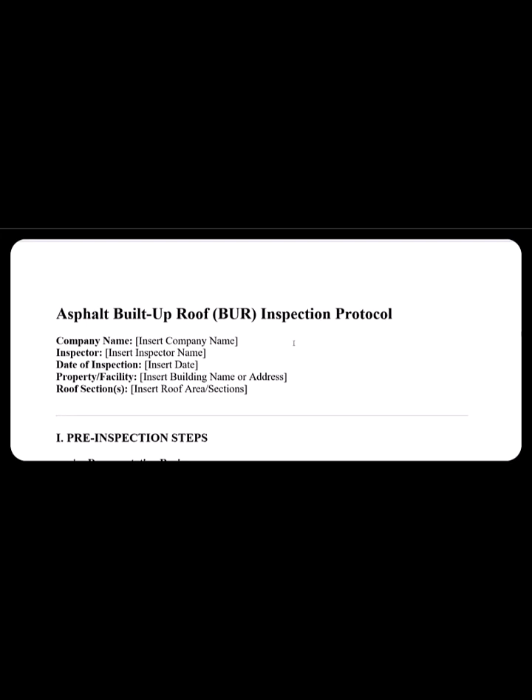But anyways, provide maintenance schedules for coatings or gravel redistribution, and then note the access, the protocol, and protective measures. So all these are really good. If you get good pictures of their building, everybody likes good pictures of their building, just like we all like good selfies, right? They like the same thing. So provide good documentation, good reports.